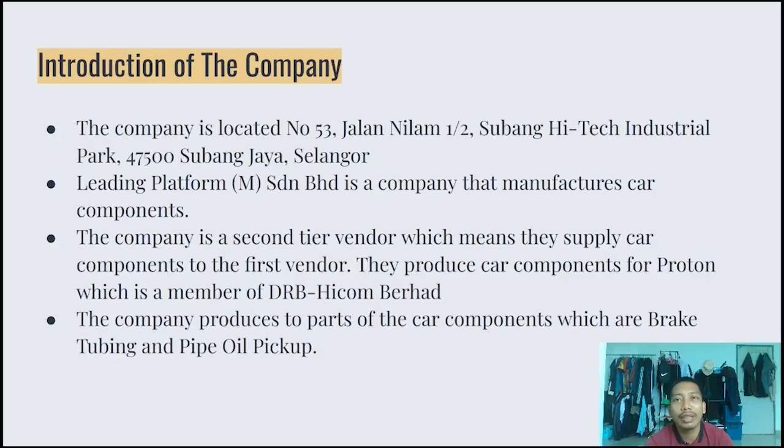The history of the company: Leading Platform Sendirian Berhad was founded on 22 September 2004 in Selangor, and the company was sold to PTIS Engineering Sendirian Berhad in 2012.

As we already know, the product that has been made is brake line tube. I will explain the details of the manufacturing process of the brake line tube.

The first process is metal cutting. The raw material is cut to 576 mm. The raw material had been imported from Korea.

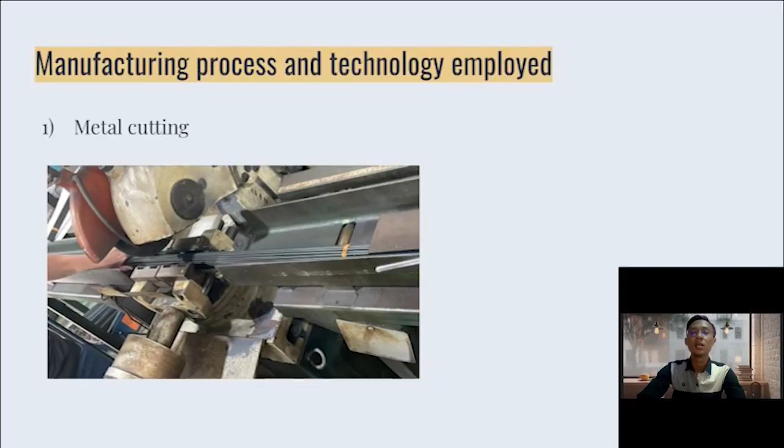The next process is deburring and air blowing. Deburring is the process of removing small imperfections known as burrs from machined metal products.

Deburring is a material modification process that removes sharp edges or burrs from a material, leaving it with smooth edges. It is commonly performed after the machining operation, which typically leaves sharp edges on the material.

Deburring can be performed using a wide variety of methods. The method used in this factory is wire head deburring. The product is then cleaned by air blowing to remove excess material from the deburring process.

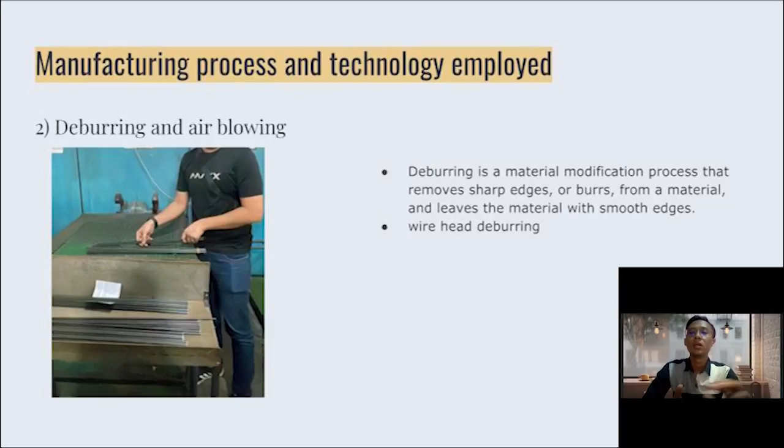The next step is forming. This process is the most crucial part in manufacturing the brake line tube. There are many types of flare that can be made by this forming process, and this forming process is used to produce double flare.

Flaring brake lines ensures a leak-proof connection without extra materials or sealant. If the brake lines are not properly flared, fluid will leak, which can cause brakes to fail.

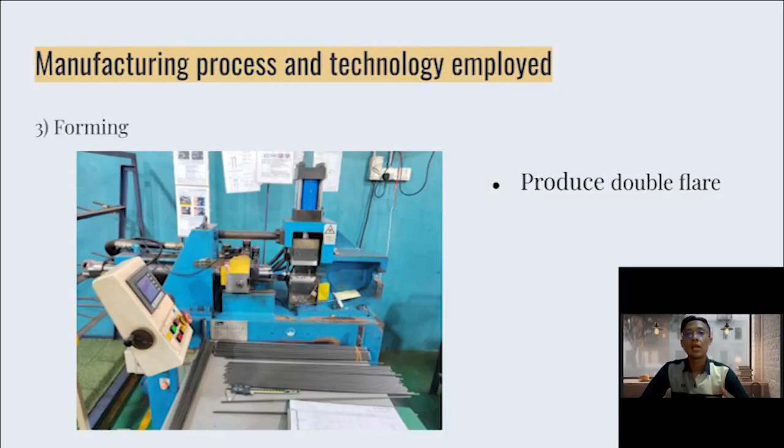This is necessary to prevent cutting off the flare and failure of the tube assembly under operating pressure.

The next process is anti-rust application. It protects products against corrosion, lubricates and protects the metallic surface to extend its service life.

The other part in manufacturing this product is the sumi-tube. A long sumi-tube is cut to the dimension set by the manufacturer.

Then the previous part is inserted inside the sumi-tube. This sumi-tube is then heated and shrinks to make sure it remains in its specific place on the product.

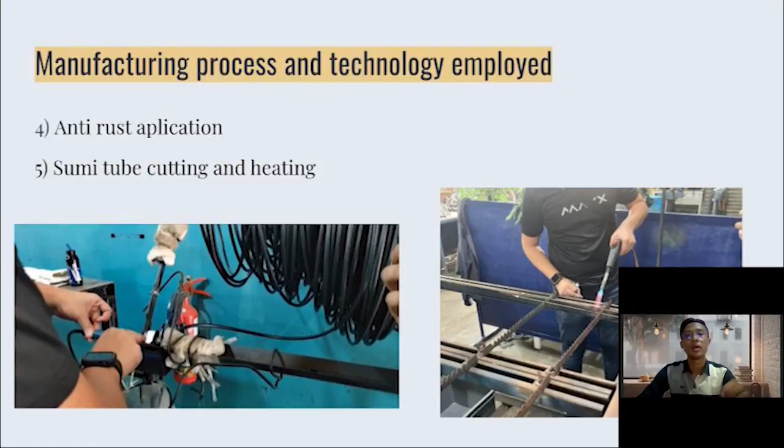The next step in manufacturing this product is manual bending. This manual bending is very special because the jig used for this manual bending is made by themselves.

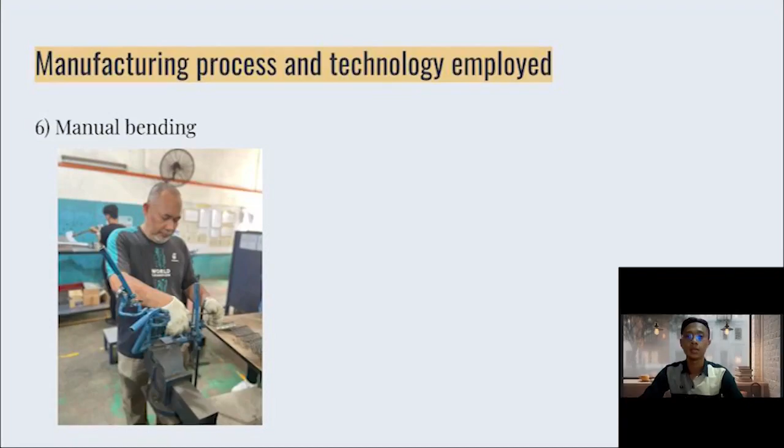The final step in manufacturing this product is installing the clip. The clip is installed at a specific place along the product, as set by their customer.

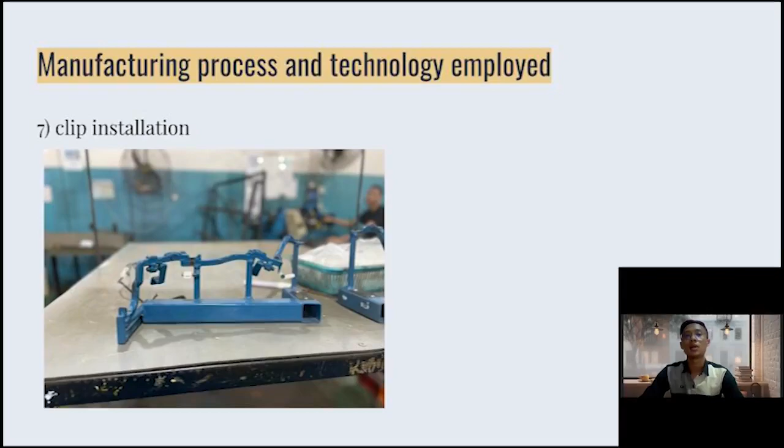When the driver presses the brake pedal, hydraulic pressure is generated in the master brake cylinder so that a braking force can be produced from this.

The hydraulic pressure must be transmitted to the wheel brake with the assistance of the brake fluid. In motor vehicles, this happens via the brake lines.

Brake lines are categorized as brake pipes or brake hoses based on their design. Brake pipes are rigid and made from steel.

They are installed in the engine compartment, underneath the car body, or in the wheel arches — anywhere movement of the brake lines is not expected.

Depending on the application, brake pipes vary in shape, length, diameter, and connection fittings. A plastic or zinc coating provides protection against corrosion.

Brake lines perform an important task in modern brake systems. To safeguard the overall function of the brake system, they must transmit the pressure generated by the driver or the brake regulating system to the wheel brakes.

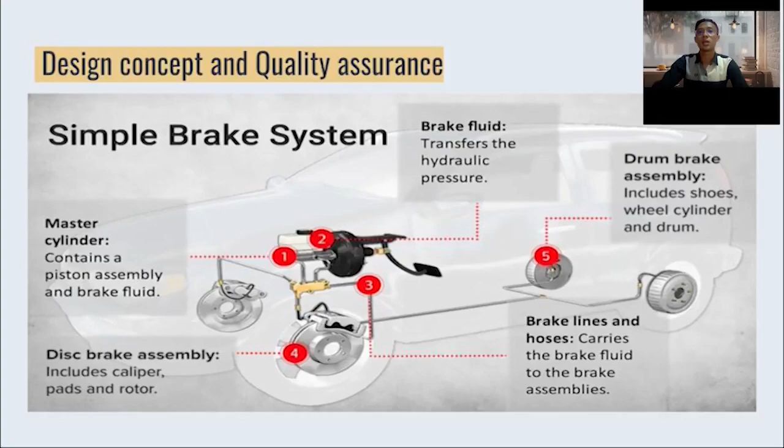This manufacturer produces a brake line tube for a local automotive company, which is Proton.

For the quality assurance part, first let's explain what quality assurance, or QA, is. QA is any systematic process of determining whether a product or service meets specified requirements. QA establishes and maintains set requirements for developing or manufacturing reliable products. A quality assurance system is meant to increase customer confidence and company credibility, while also improving work process and efficiency, enabling companies to better compete with others.

There were 3 quality assurance practices applied in this manufacturing company. First, the operator must be well trained before using the machine. Next, the change needs to be made before the tool starts to wear. The tooling used in the forming machine has a life cycle, and the manufacturers had set the parameters to change the tool after 100,000 uses.

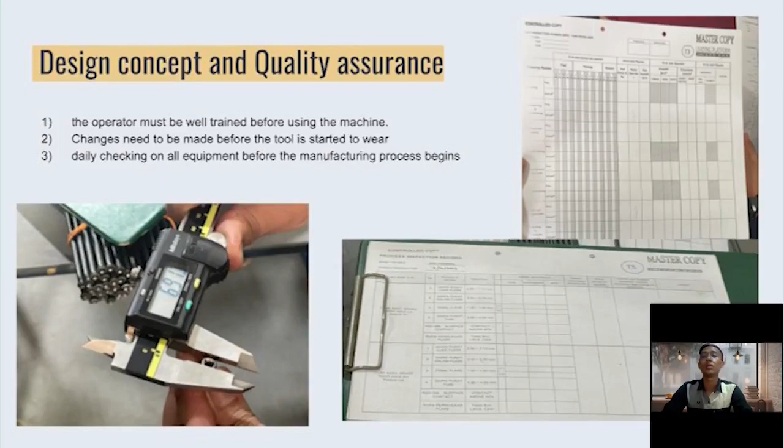They use calipers to measure the parts at a tolerance of 6.6 to 7.1 millimeters, checking the first and last of each bundle. If the first follows the tolerance but the last does not, all the parts will be quarantined to do 100% checking. Lastly, there is daily checking on all equipment before the manufacturing process begins. The manual bending is checked monthly to monitor its precision in bending that follows their customer needs.

Assalamualaikum. This is the product produced by the company from the industrial visit. This is the brake pipe tubing for Proton model cars such as Proton Preve or Proton Suprema S.

Brake pipe tubing is used in the braking system of vehicles. It is typically made of a durable, high pressure resistant material such as steel or stainless steel, and is designed to withstand the high temperatures and pressures generated by the braking system.

Brake pipe tubing is used to transfer brake fluid from the brake master cylinder to the brake cylinders or wheel cylinders on a vehicle. It connects the brake master cylinder, located under the hood of the vehicle, to the brake calipers or wheel cylinders located at the wheels.

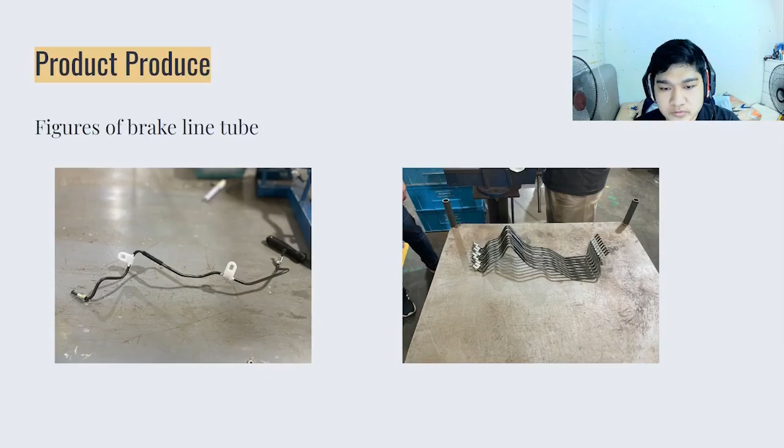The brake pipe tubing is typically a flexible hose that is bent and rotated to fit the specific design of the vehicle.

Next, I will explain the problems faced, or the product defects, when undergoing manufacturing processes. Firstly, the nut is fitted in the wrong direction, which makes the product impossible to assemble.

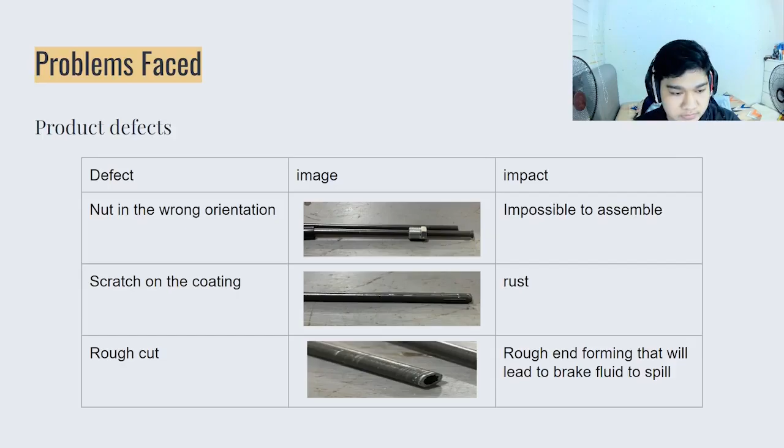Next, scratches on the coating lead to rust, which makes the product fail when constant pressure is applied to it. Lastly, rough cuts cause rough end forming, which leads to brake fluid spilling, causing a pressure drop when braking that may cause an accident.

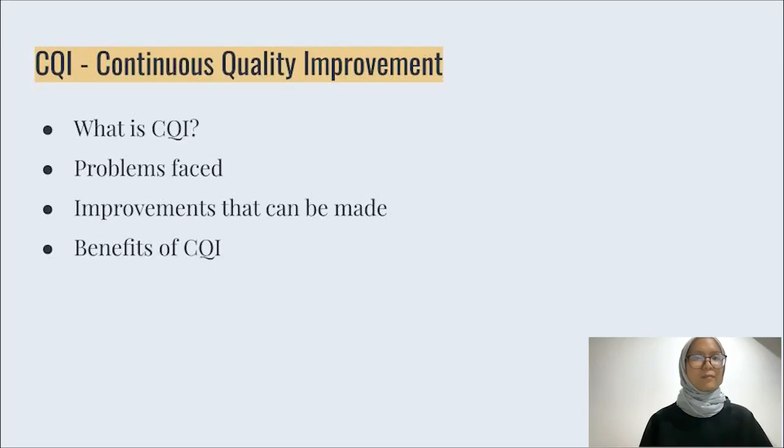We only discussed this on WhatsApp for much easier documentation, because sometimes when you just talk, the message does not hold in their mind. That's it, actually, and thank you.